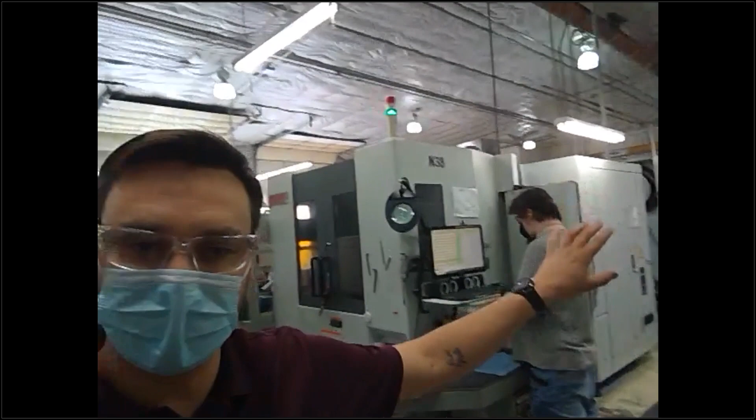So this next area is the production mill area. And let Dagan tell you about that. Yeah, we kind of have 4 main bays, the first of which is our production mill area. Down this row, we have a variety of different mills. We have 3 horizontal mills that's doing some of our more complex work, allows us to access parts from various angles. We then have 5 vertical mills kind of in a row and one behind you here where we do a lot of standalone, smaller work envelope type parts.

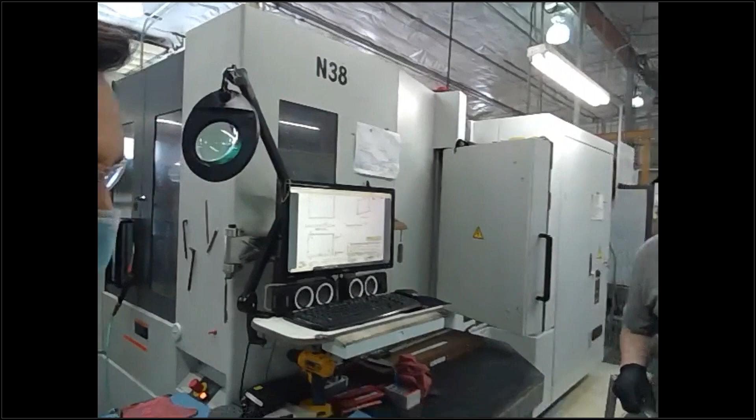Oftentimes, our operators are doing what we call bar to box. So they'll be cutting their own raw material. They'll be loading the parts into the machine. You can see right here at the workstation, we're almost completely paperless thanks to ProShop. So we have the prints open at the workstation. The inspections being done at the workstation. The parts will actually be washed and then put directly into the box right at their workstation.

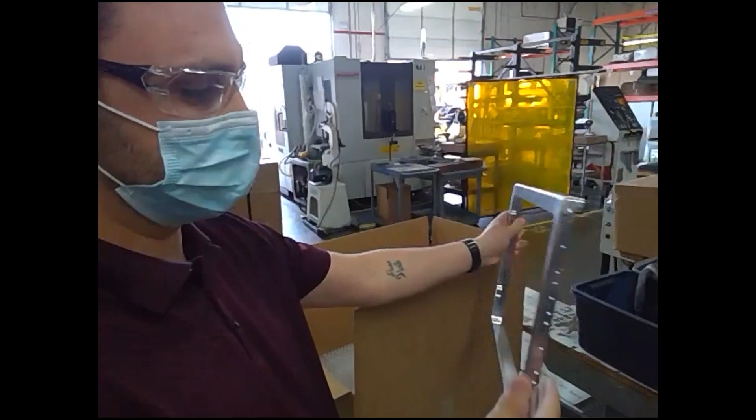An example of the type of parts that we're working on. A lot of aluminum. This particular part's on a horizontal because it's got some side features. And then they're packaging it up and going.

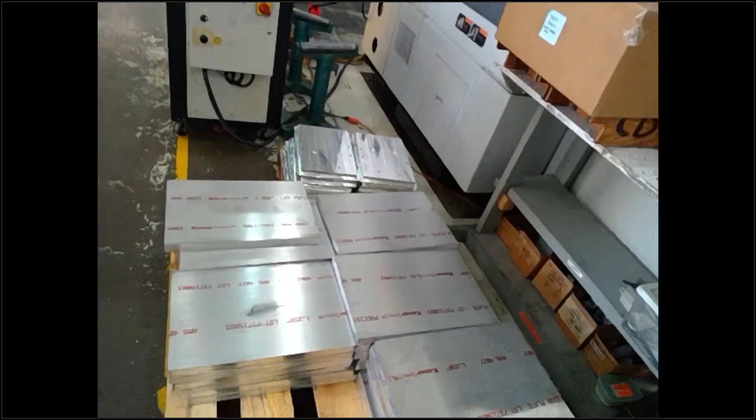So yeah, in the bar to box concept, so there's a plate of raw stock, and then it's going into the machine for a couple of different work holdings on the various tombstones. Coming off, getting inspected right here on ProShop. We can probably even pull up an inspection form here.

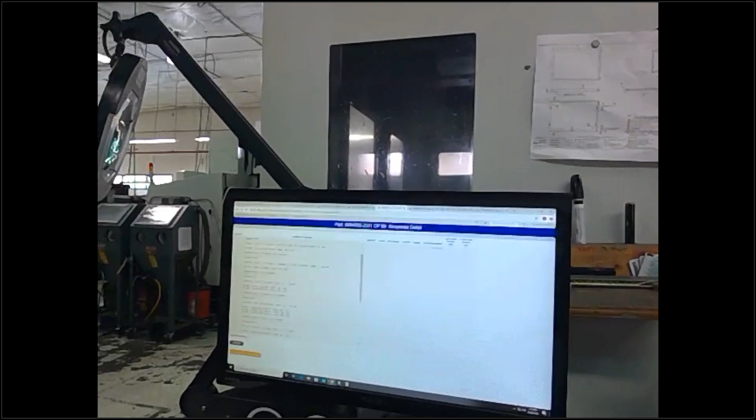Yeah, so here's an example of an in-process inspection that's happening. It's flagging the dimensions in yellow that might be a little closer to the limit, and telling him if anything is bad. And then, like Dagan said, packaged up, washed and rinsed, packaged up in a bubble bag, and put in the box, completely packaged, ready to ship to outside processing.

So we just looked at the Traveler, the job Traveler. Essentially, yes, that was the Traveler. Yep, there's no paper Traveler. There's no paper travelers.

Every one of our workstations has a computer with ProShop on it. They'll usually walk up, read their time-in that's in ProShop, see what job they're running, and then read the work instructions right there in ProShop. Tells them everything they need to know.

You can see some other examples as we kind of continue on here. We have 2 machines here at the end that we'll stop and take a look at.

Maybe show how they identify the product itself too. When you're looking at a pile of parts, how are they actually identified? Because there's no paper involved.

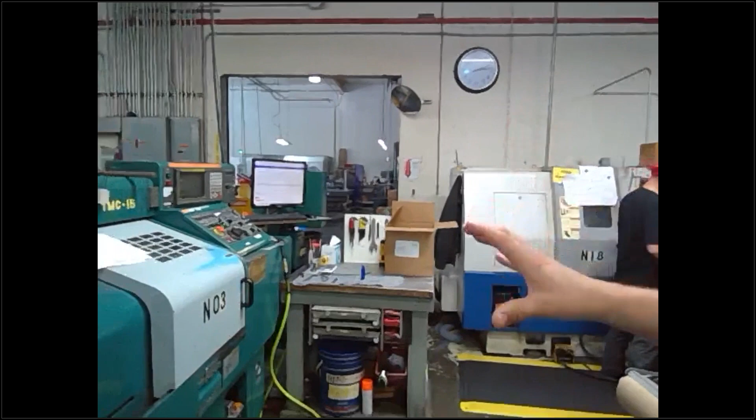We have two machines here that are flowing together. This is now our lathe department. We're running our first operation here. He's got all of his instructions open for that operation. This is what we call the sequence detail, so he's looking at all the tools coming in and everything that's going to happen to the part in each operation in the machine. The part then flows over to this next operation.

As he's running, he's inspecting at his workstation, washing the parts, getting them ready for packaging. And then again on the screen, there's the Traveler.

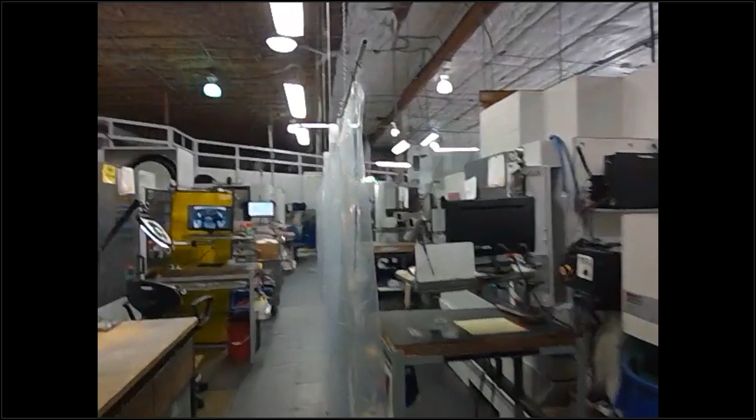You guys hearing us okay in this area? Yeah, it's good, thank you. Still hearing you pretty good. I'm not seeing any comments, so I think we're good to go.

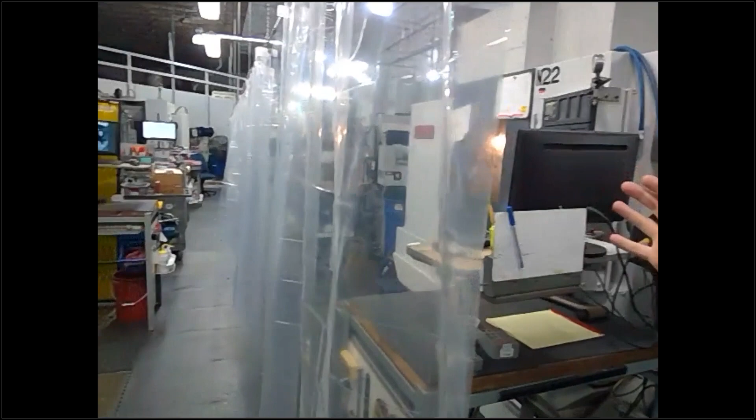You can see our innovative shower curtain solution here to keep a 6-foot distance between people. This workstation isn't currently running today, but it's a great example of how we usually flow these two machines, one operation to the next, with the operator running both machines, blending the parts, masking the parts. He blasts the parts in a blast cabinet, inspects them, and then boxes them up.

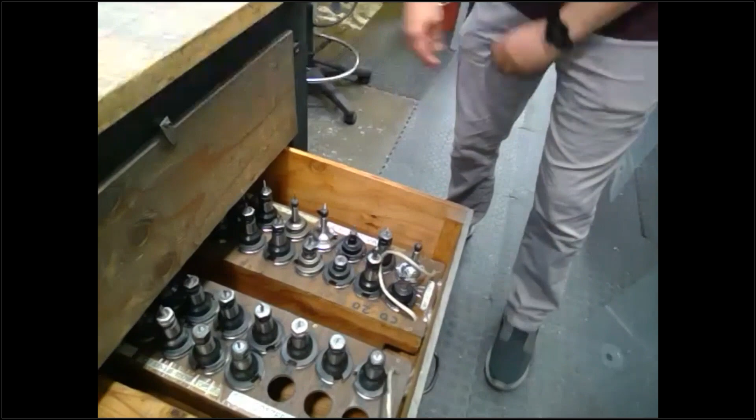One of the more important aspects of making sure jobs get set up well is getting things prepped with what we call a pre-processing checklist. This cell is dedicated enough that they have preloaded tools all ready to go, all labeled for different part numbers they make. That process is also done over at their fixture setup area, which we'll go take a look at.

Here you can see a couple examples of jobs that are ready to get set up. We pre-process them with the tools in a caddy, put the fixtures on the cart, and really anything the operator is going to need to get the setup going. This wheels directly over to the machine so they can load these in, and we'll show you over here how we get this set up and touched off.

I know the signal was a little rough when we were testing. How are things looking over here? No, it's looking good, thanks for that. Awesome, great, it looks pretty good.

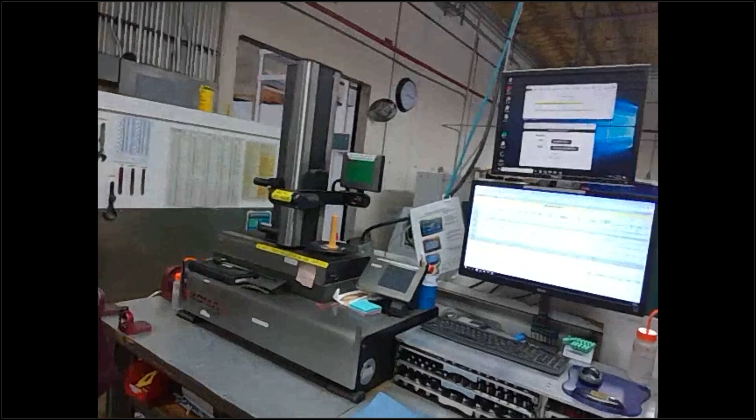This is our tooling area. We have, I think, over 4,000 different cutting tools in our current tool inventory. We have a dedicated pre-processor who sets up the tools for the operators so they can load them into the machine and get going in a relatively quick time frame.

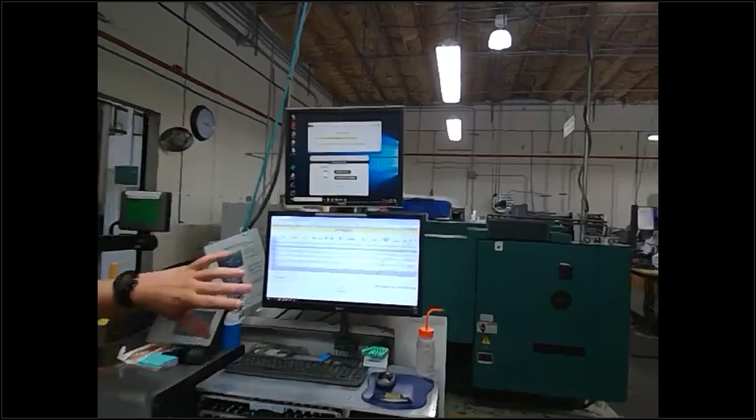He's working with ProShop here. He knows what jobs to set up by looking at the schedule, and he knows what tools are required because they're in what we call the tool master of each job. So he'll open that up, build the tools into what we call a caddy, the wooden caddy we have here, and then touch them off using our laser presetter, which integrates directly into ProShop.

So he can touch the tool off, hit input, and it's going to load all of our tools and their relative tool height into a file that is then uploaded directly into the machine. That eliminates a lot of operator errors, so they don't have to go touch in their tool heights and make a mistake potentially. It's been a very, very solid improvement to onboarding.

So the next bay is what we call our Trulife medical bay. When Trulife took over almost 6 years ago, they make a whole line of modular adapters for lower leg prosthetics, and we took on the machining of all the metal components. So this next bay, we kind of turned into that use.

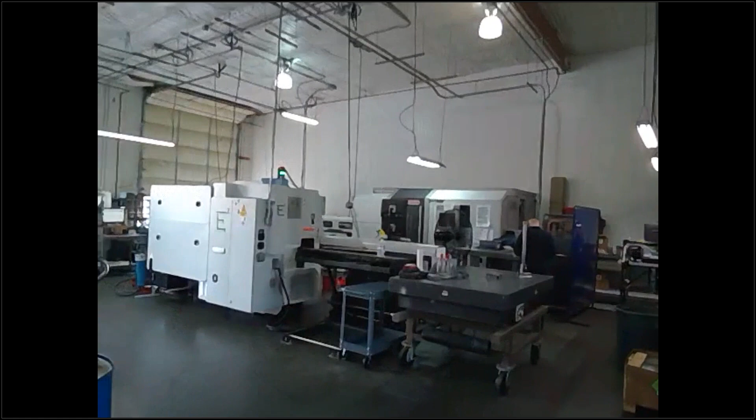We have a couple pieces of equipment that we bought to do that, and then a few that we got from our sister company. So we have 2 lathes right here that are very, very high volume. In this machining cell, monthly, we do 12,000 to 15,000 parts per month.

Both of these lathes run almost nonstop. We try to run them continuously, lights out if we can. And then we have one cell system right here, one spindle, but 15 different tombstones that we store in the back that basically will fixture up the job, leave part numbers set up, and we can kind of keep going. If you want to pan over to the machine, we can take a look at it running a little bit here.

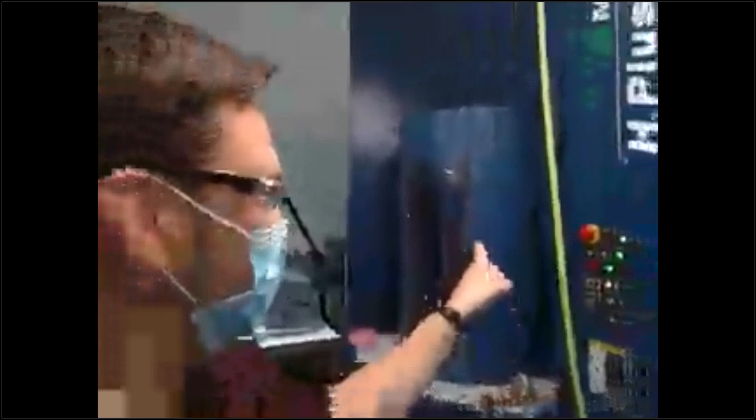Like I said, this machine has 15 stations for tombstones in the back, so we leave these jobs set up. There's a robot that schedules and picks up the work holding and moves it into the machine. We can often schedule several parts to run in a continuous fashion, where the operator will then come over and unload parts periodically.

Also scheduled, inspected, and with all the work instructions right here in ProShop.

Yeah, I wanted to point out this workstation over here. We see more and more of our customers go into this kind of setup where they have the work order down below, and oftentimes they'll have a drawing up on the second monitor. For a shop floor space, going vertical is pretty space efficient.

And you guys still hearing us okay? This is the area that was roughest with the Wi-Fi. Yeah, the video is a little choppy, Paul, but the audio is coming through clearly. Thank you. All right. Hey, Kelsey.

Kelsey, could you go ahead and ask some of those questions out loud for the benefit of everybody? Oh, for sure. Yeah, I was just churning away on them over here, getting them knocked out. But yeah, let me go ahead and just talk a little bit about that.

Just to be clear about travelers, when these guys are talking about that, that's definitely referring to some sort of work order paperwork that would have been standard but is now non-existent. There is no paper traveling with the job, instead it's all digital. And then in terms of identifying components, typically you'll see work order labels that have a work order number, a picture of the finished components, usually a quantity, a part number, that kind of thing, physically attached to the parts so they're clearly identified.

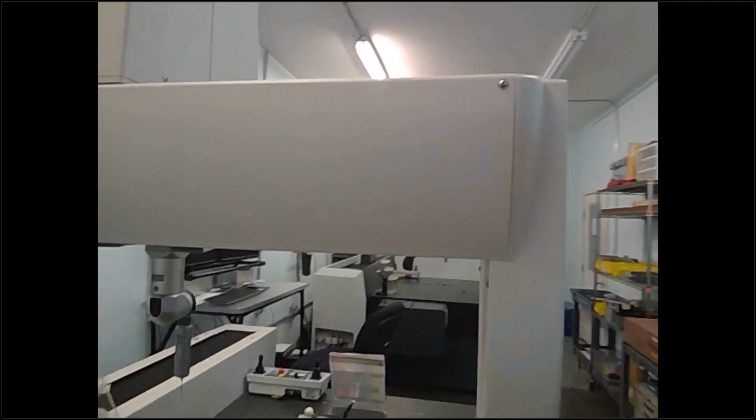We also do all of our calibration in this room, climate control.

Yeah, and all that calibration is also managed inside of ProShop with an equipment module that is used for both calibration and preventative maintenance for any kind of equipment. It sends proactive alerts to the people that are in charge of doing that kind of maintenance activity, and they go grab the devices and bring them in and calibrate them.

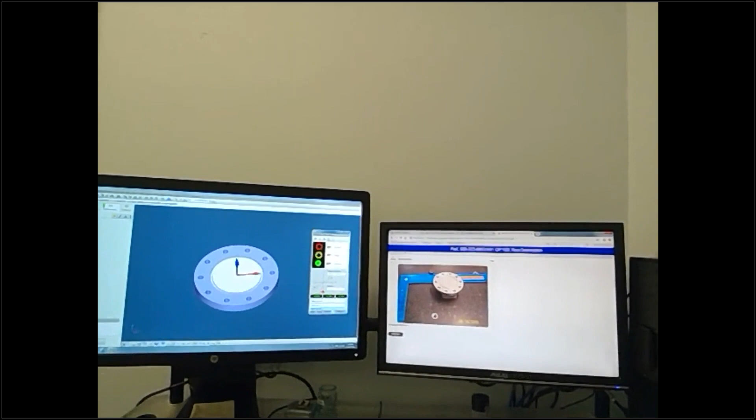Great, thanks. I'll take another question while you guys are moving on to the next bit. There was just a question about, do operators inspect their own parts? I think that's very much a choice companies make individually, but quite often companies choose to have at least a significant set of the in-process inspection done literally at the machine while the parts are being produced. ProShop supports a methodology where, if you have 10 dimensions to check on a 10% basis, you might as well go ahead and check one every part and get that actually validated. Then every part gets a little bit of inspection, even if your average over the run is only 10%. So that's definitely something ProShop supports, and lots of good companies are catching defects much, much earlier through that mechanism.

And what you're seeing on the screen now is just an example - on the left side is the Calypso software, and on the right-hand side is the ProShop work instructions for how this is set up on the table itself. While there's not a part on there, you can see that T-square that they use to align the part in the right location. So just another example of visual work instructions.

All right, let's go. We're going to go check out the prototype department. We should mention, because this is a Saturday, the weekend shift is on, which is a lot smaller in many shops, including here at Trulife. So normally there's a lot more folks here walking around.

This next bay is comprised of our prototype group. Those are journeyman level machinists who have Mastercam at their workstations. Usually their work is confined to small quantities with a quick turn. A lot of the administrative planning functions get bypassed, and these guys figure out how to make the parts kind of all on their own and turn them quickly. Currently we have five full-time prototypers, one dedicated to the weekend shift, so he'll be over here programming and machining as he goes.

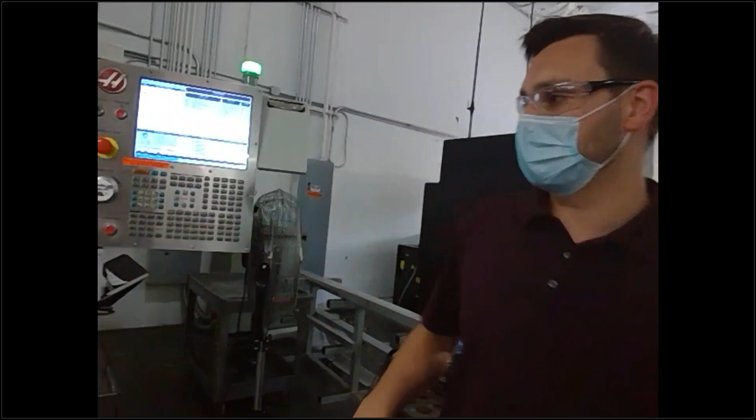Also within the same bay, we have our production 5-axis. Here's a 5-axis Haas machine and an operator inspecting as it goes. We'll go take a look in the machine if you can make that out. This is a big enclosure for a fan for an airplane, I think an air circulation fan, and we can see an example of one being inspected. Say hi, pretty cool part.

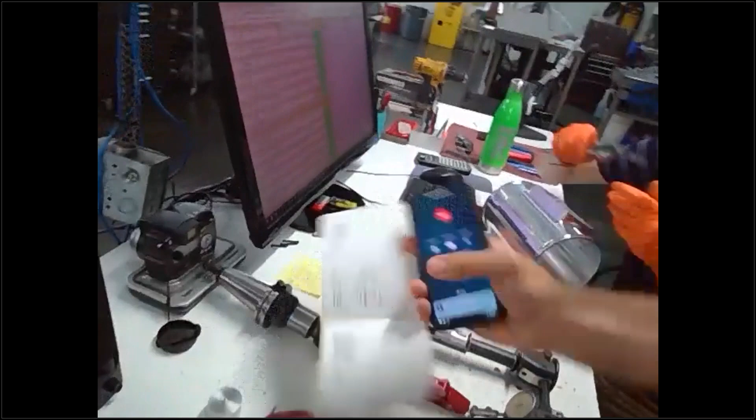On the screen is their in-process inspection results, like you've seen at many other stations. And here, by the way, are some of the job labels, and in these I believe they even label each individual part, just printed off on a label printer.

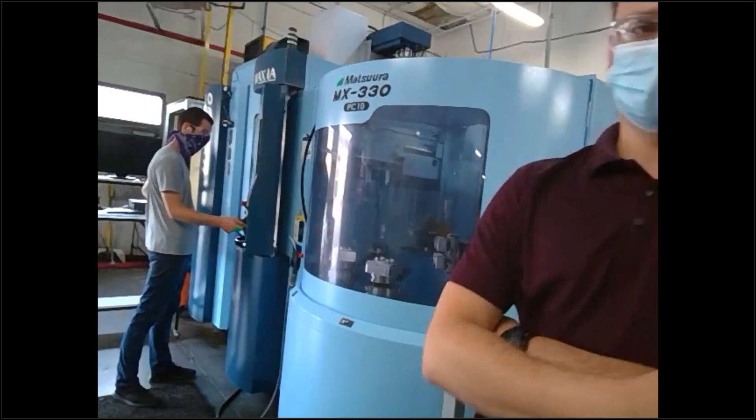There's been a couple questions in regard to those labels. Those labels not only identify the work order specifically, but have a little bit of context of the entire job, including often a picture of the finished part, so people can visually identify exactly what they're working on. But the intention is to deliberately not provide information on the labels that would become obsolete quickly. We're trying to show the limited amount of information that keeps people in the know without getting to a situation where you're no longer meeting your AS and ISO requirements for revision control of documentation. So we cut the line there at a box label, without going all the way to a level of routing steps and who should be doing what—that information should all be digital, so you can maintain it at the correct revision all the time.

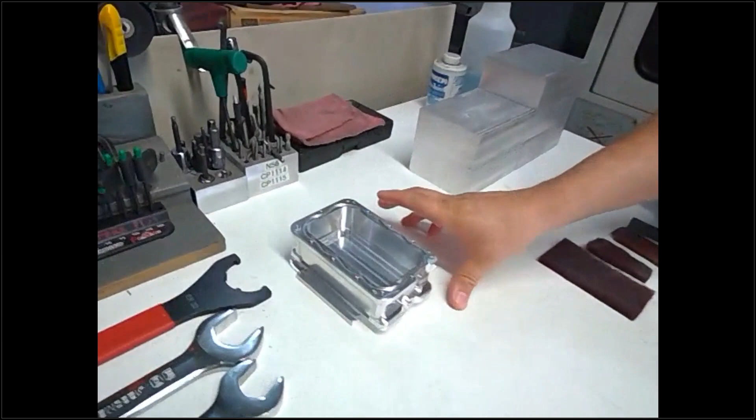We have another example here of a part that has some pretty detailed work instructions because of some cosmetic requirements. We currently have this running on a 5-axis machine. You can see the operator had his work instructions open, and it shows him exactly how to process this part—how to load it, how to tap it down, what to do once it's finished. It shows him pictures of the finished part, detailed instructions on how to get the part to that state, so we can really standardize our work and make sure our products are looking consistently up to our par.

Hey Dagan, I had a question for you along that line. One of the main things I often get asked when we look at this kind of detail is: what did it take you, like 10 hours to document this? Or is this the kind of process that, with a phone camera and ProShop on your phone, you can do in 20 minutes? What are we talking about here?

Well, first of all, we ask that when we do a setup, we verify that the run description is up to date before we certify the job to run. So this is something we do every time we set a job up for a first run, and it happens pretty quickly. We have a camera that integrates right into ProShop—it loads into what we call a camera file holding tank, and they load their pictures. But we also have a process of continuous improvement, a constant feedback loop through part development, where each time we run this job, operators have the opportunity to identify process improvements that can be integrated right into the run description later on. Oh, awesome, thanks Dagan, I appreciate that.

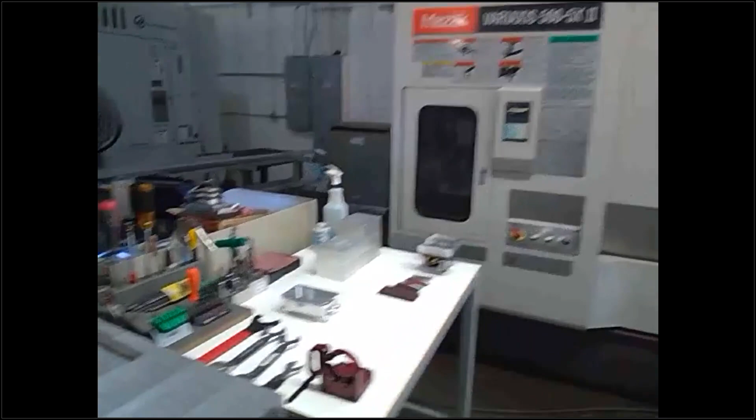Going into fixturing, it's coming off the machine complete on the 5-axis, and inspection right over here. And then, as I showed you before, the box with the label and the parts, bubble wrapped, and even the operator employee number is tagged on there too, so we know which employee made every single part.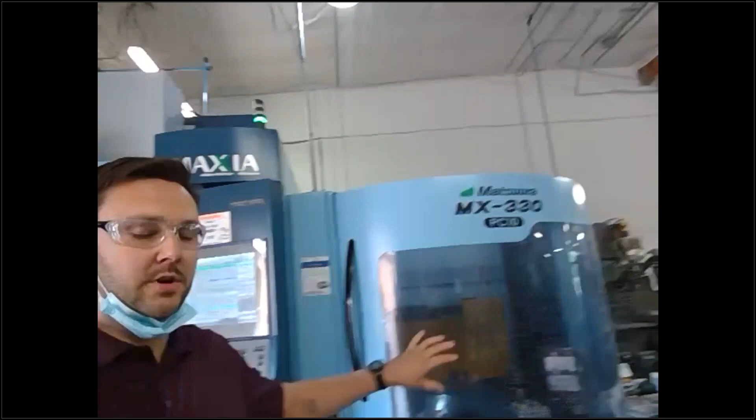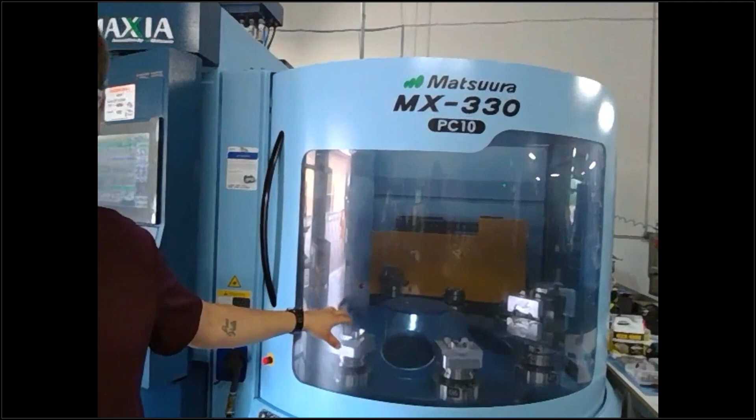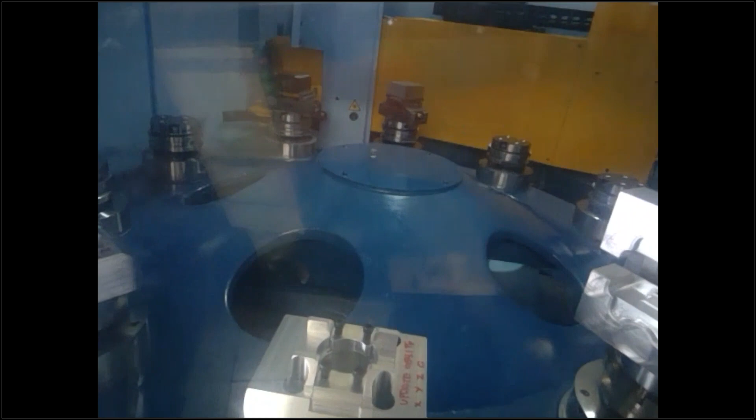This is one to touch real quick. This is our newest piece of equipment, just delivered a couple months ago, a 5-axis semi-cell system. We have 10 pallets that we can load up and basically keep running, pretty automated. One of the reasons this 5-axis department runs with only one person back here is that we can load all these parts up, schedule the machine to run, and have it run continuously, lights out. It's allowed us to become a lot more efficient. We get really consistent part quality, and we're pretty happy with this new addition.

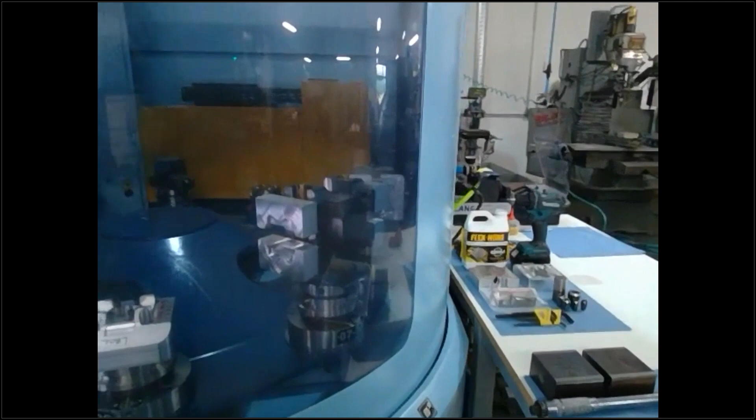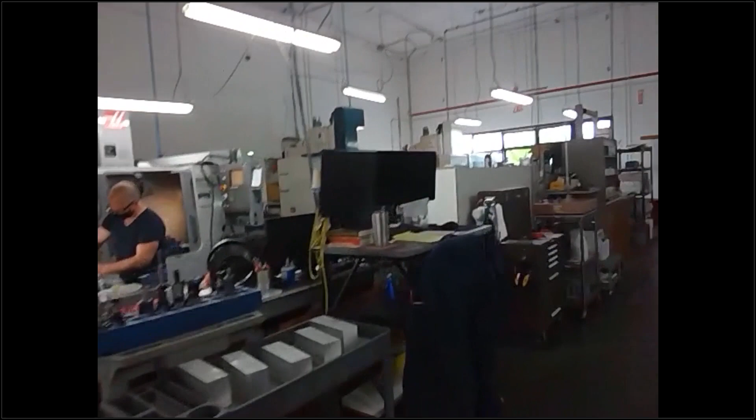Just for a bit of history, we decided - what year, Kelsey, did we decide to go with a dedicated prototype department? A long time ago - 2002, yep. We were trying to mix prototype jobs in amongst production jobs, and as I'm sure most of you know, that's a really tricky situation sometimes.

Wanted to stop and show this - I sent a little LinkedIn video on this. This is one of the lean projects that the crew built years and years ago. This is a mobile packaging station. Up at the top here, you have different sizes of bubble bags, all with their labels, some plastic bags, the tape gun, a little pull-out shelf which pulls out, gives you a spot to package, a few different sizes of boxes right down below, and that's all sitting right next to this label printer, so you can print off those box labels or packing slips when parts are ready to go.

Yeah, thanks for that, Paul. There was actually a question about that - where and when are labels printed - and I think I said that you should always print labels as soon as you have physical product to trace. That's the whole point: you've got to identify your product as it goes through the company, and that's an example of that. The other thing people often ask is, why do you have a machinist packaging parts?

That's always a question, and the main answer is that typically, if you process a product through its value stream as far as possible in one go, you can actually eliminate more waste than trying to segregate it and move it and have it sit in places. That's lean philosophy at its best - try to get that process through as quickly as possible. You could ship those parts we looked at in bubble bags right now. If somebody came and said, hey, we need to get those out to plating, they're ready to go. All those parts, however many you have, are ready to go. So that's one of the values there.

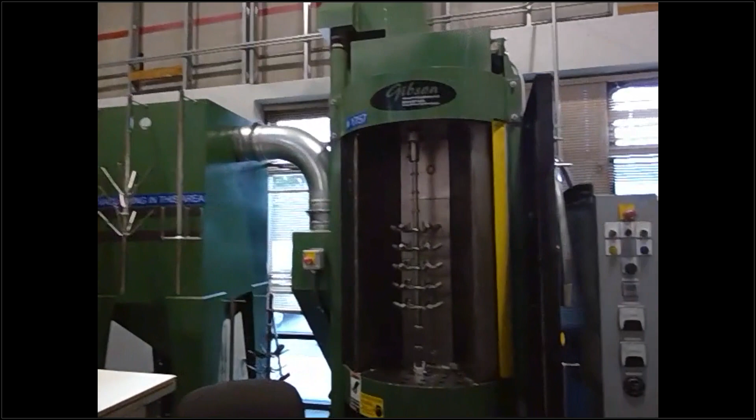And typically we found a lot more value than maybe something where you have a little bit of difference in pay scale between someone who does packaging or machining. It also reduces your risk of having your pile of parts knock over and damage each other. But yeah, there's lots of risk mitigation there. Sorry, I'll let you guys carry on.

All right, we're looking here at our shot peen machine. This is where we take our Trulife medical product, all the aluminum components. After they've been machined, they come back here and get shot peened. A couple things - it's going to strengthen the material a little bit, and it's also going to provide a cosmetic finish so that once we send it out for anodizing, they come back looking very uniform. You'll see an example of some of the finished products as we get closer back here to assembly.

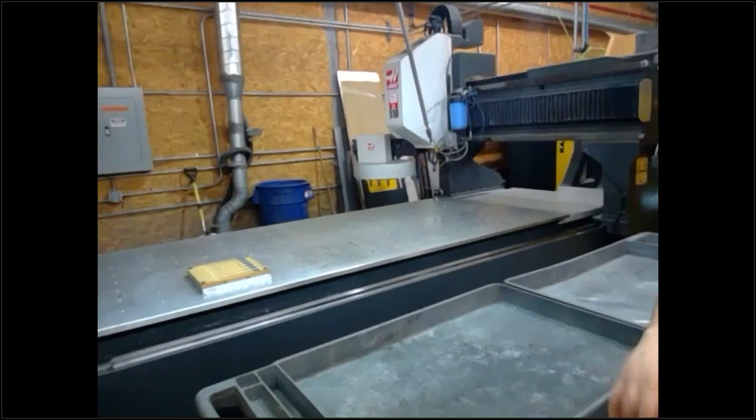And then right behind us, we have two larger work envelope machines - a large Haas VF7 and a Haas gantry. The gantry is used mostly for tooling projects and smaller type projects that don't necessarily require a lot of coolant. And then we have this big machine here that we do larger hog-outs on, some machine prep operations, and then we also will load up with a high density of small components as well.

We have one other work cell that's currently not running as a result of the current situation, but this is entirely dedicated to one project. This bay and this one machine right here is dedicated to a project we have directly with Boeing to supply basically a coupon. So we have a 50-taper horizontal mill right here that's tooled up with two vacuum fixtures.

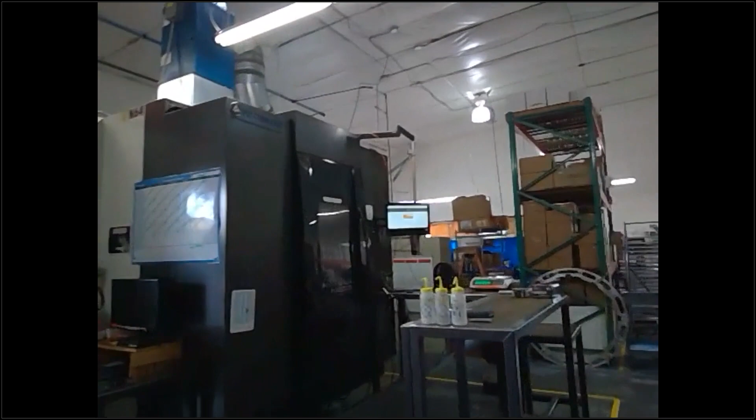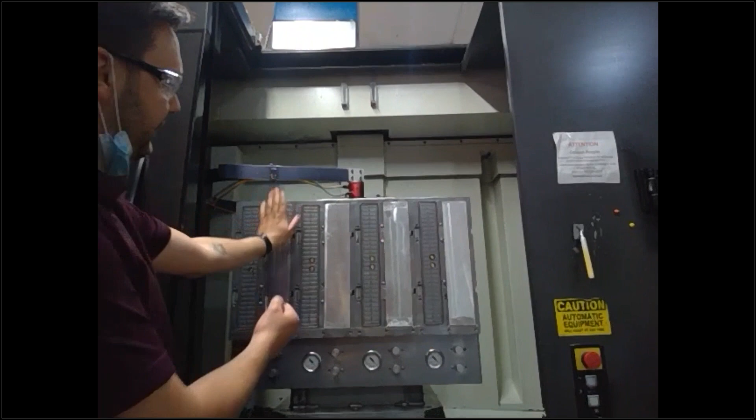Allows the operator to load the raw material into one station and then flip it 3 times with each cycle, so that each cycle you're getting one finished part off and continuing the next part along the progression until you get a finished part. We typically, when this was up and clipping along, we were doing about 10,000 parts a month just through our coupon production cells. So a lot of raw material storage and challenging traceability to manage, but overall the machining process is pretty simple.

And then the next group we have here is our assembly group. So there's some larger tooling type assemblies that we work on consistently, and then we have a lot of standard aerospace general assembly. So a lot of insert installation. Looks like we're doing some wet install and a little bit of insert installation there. We have a paint booth.

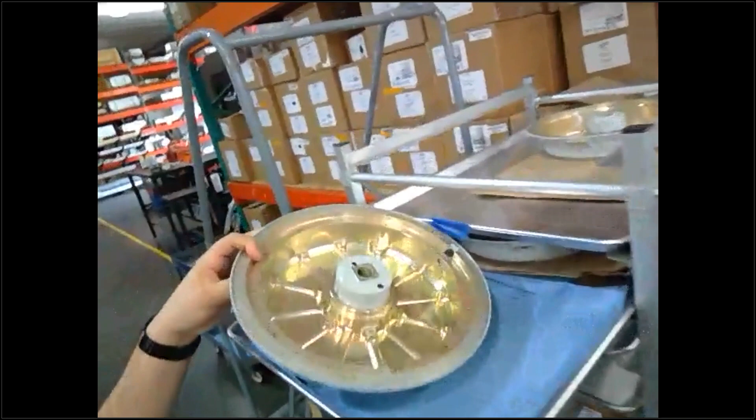A good example of maybe a part. Look up here, to do some insert install after it's been machined. Goes out and gets painted. Comes back, gets a couple of press pins and some inserts. Out the door. And then, in addition to our aerospace general assembly group, we have what we call the Trulife assembly group that is doing all of the final assembly and packaging for the modular adapter line that we talked about.

So these guys, once the parts come back from anodized, they head over in this direction. They get laser engraved so we can put our logo and part number on the part.

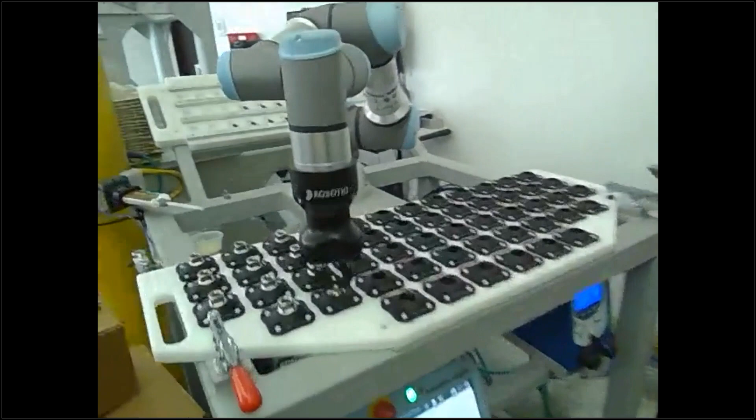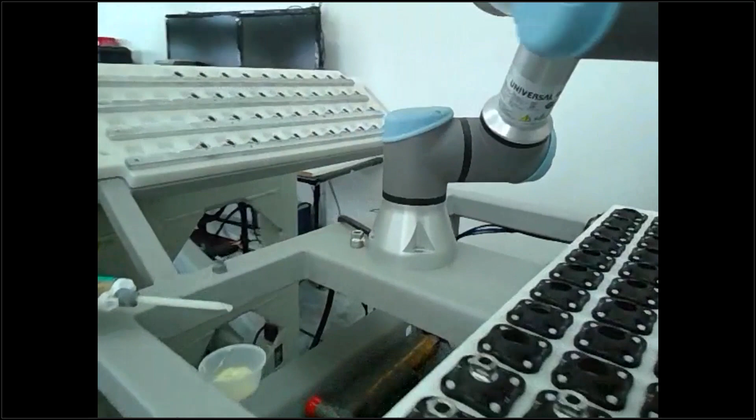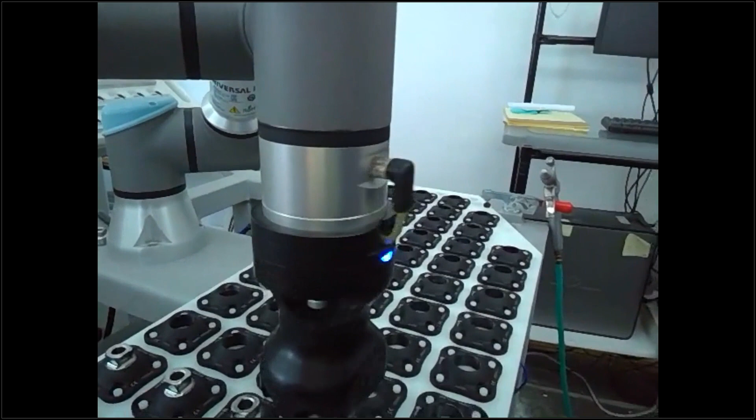In this case, we've actually automated one of the assembly functions here. So this is a UR robot that is currently bonding a threaded pyramid to a base. So what it's going to do is pick up the pyramid from a back tray, apply some glue back here, and then thread it down into the base. So I think we package and sell about 2,500 of these a month, and it became clear that automating it would be a pretty slick maneuver. So we tried it out. We were really happy with the results here.

The rest of the assembly functions, you can kind of see some examples of the finished parts. A lot of them are just set screws and packaging, but we go as far as put the parts in a package, a label, manual, and then actually get directly out to distribution. So this is kind of the final assembly for a lot of this product. Our sister company will do the complete assembly of the feet, and then a lot of that will actually get done in a clinic.

See lots of shadow boards and sort of lean workstations all set up for just their specific purpose.

We're gonna walk back up to the front. If anyone has any questions, now would be a good time to maybe answer. You guys still hearing everything and seeing it okay? Yeah, it looks great, Paul. I had a couple questions I thought I'd bring up as we're going through, as you guys are walking back up. One of the questions was, how do you maintain lot and labor traceability? Obviously, those two things are a little bit separate, but if you guys wanted to just even show a workstation where someone's logged into a job, that might be helpful.

But basically, the short answer to that is on the lot traceability, yes, everything is associated with a work order, but beyond that, ProShop also supports full serialization, which would include individual serialized pieces. Each component has its own serial number, which I think you guys noted there was some area where each part was getting a tag. But also, you could serialize a small batch of parts as an option as well. So the thing about traceability in lot traceability would include completely all the way back to raw material. So when they prepare a document package, and you guys may be headed back up to the final inspection area now, but just taking a look at a completely prepared document package might be a useful thing.

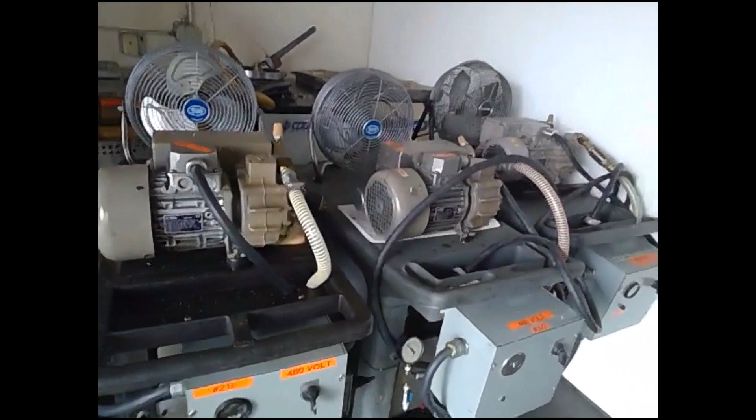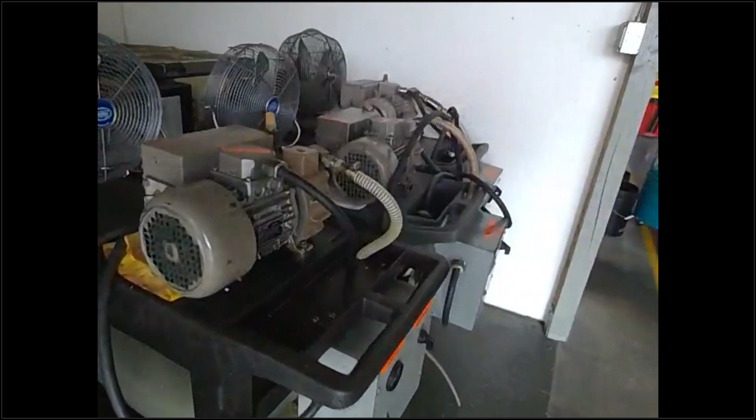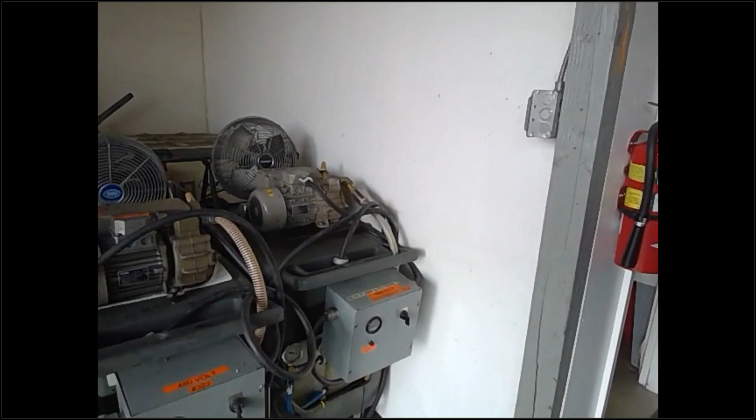What I wanted to stop for a moment and share here, these are things we built years and years ago. So we did, and Trulife still does, a lot of large flat parts that require vacuum work holding. And these are highly efficient 480 volt small vacuum pump carts that have an accumulation tank, the electrical stuff, all the plumbing, and these can be wheeled next to any machine that needs vacuum. And all the machines are wired for 480, 220, or 240 and 120 power, so you can plug almost anything they want and keep it nice and lean and make it kind of modular that way.

Yeah, thanks. There's another couple questions here. One thing someone asked is, is in-process inspection considered final inspection?

I just wanted to address that. Of course everybody treats that differently, but ProShop in general pushes companies to inspect product as close to the time of creation of the spec as possible. So if you're machining the parts, try and inspect them right at the moment that you're actually producing those parts, because then you have an opportunity to change direction. If you've produced all the parts and catch a defect later, of course you don't have any opportunity.

But almost everyone uses at least some level of final inspection, even if it's not dimensional. Even if they're validating that all the inspection dimensions were complete and done, it's definitely the case that final inspection is still an integral part of ProShop, and that often includes that sort of document package. Whether the client needs it or not, there's often a review at the final inspection before product would leave to confirm that everything required has in fact been done.

Yeah, and we'll swing by that department in a minute. Where we're here right now is in the receiving area, and we won't pull it up on the screen. The receiving guy is out for Friday, but here's an example on the desk of a material cert that comes in with some material. It'll get scanned immediately right here and attached into ProShop right on the vendor purchase order by line item, and that's the beginning of that traceability all the way through final inspection. And then the raw material will just get tagged and move to where it needs to go.

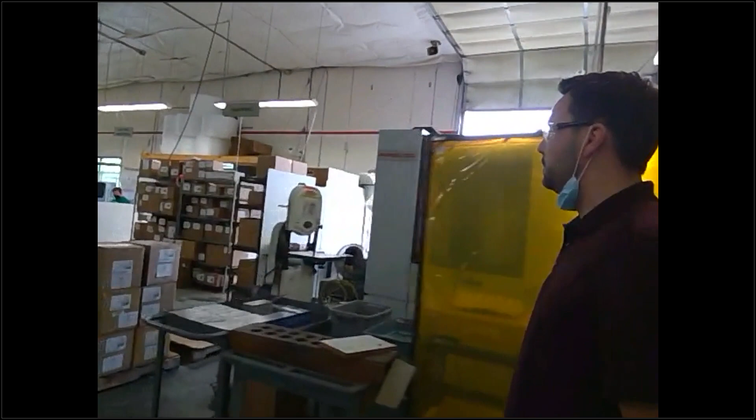Yeah, and that was actually something we deliberately left out of ProShop as an example, because it's much better managed with that kind of system than all the overhead that would be associated with decrementing inventory and trying to keep track of reality. It's like, hey, just put in the card at the right spot in the inventory and you can have a fast and efficient reorder mechanism.

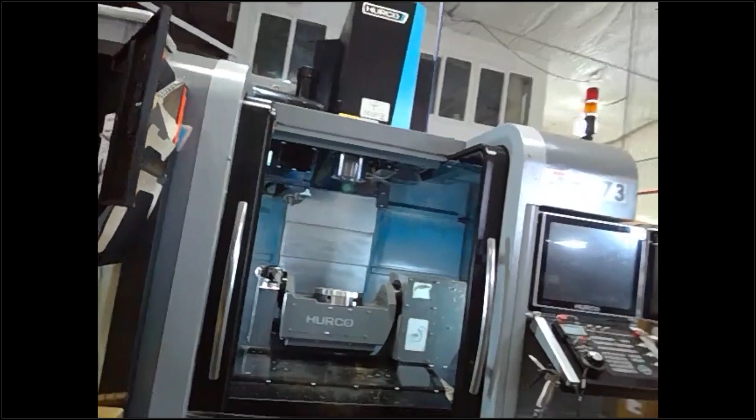So I'll take a little diversion here for a second. This is a fun area. Again, not running on the Friday, but this is a dedicated cell. We got two 5-axis machines that do nothing but these sort of very high-end saxophone mouthpieces made from various types of wood and brass. These mouthpieces go for like $850 a piece, and they're all done with full 5-axis milling, contouring, surfacing, and lollipop cutters.

It's pretty high-tech stuff. Here's an example of a finished assembly that has all the components gold-plated and all that kind of good stuff.

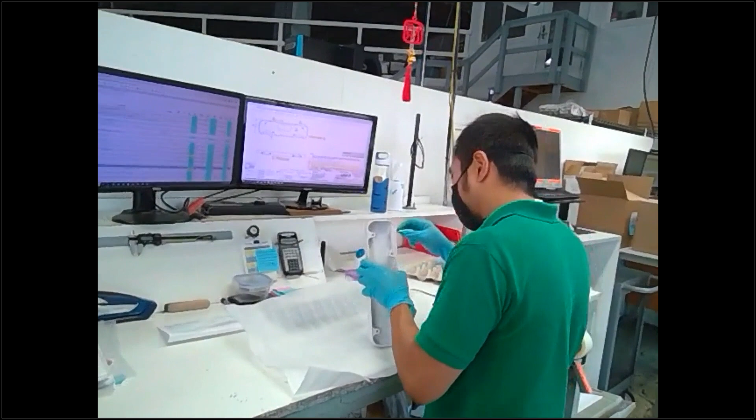So one thing I just want to touch back on that Paul was talking about in terms of tagging material. There was a whole rack full of raw material there, and people often ask, do we need to put a big label with all the details about the product on there? Obviously you could put some kind of tagged label on there, but really the same principle applies as what we were talking about with the work orders, which is you don't want that information to be relied upon as the final word. So quite often people would put just a purchase order and line item number, and if you want to do all the traceability, you can go ahead and do that through ProShop by looking up that PO line item, and then you have every detail, including who brought it in, when it was used, all the places it went, just by having that one number.

Thanks, Kelsey. All right, we'll let Dagan explain what's happening. Yeah, so we're over here in final assembly here. You can see the inspector was doing some dimensional checks. We're doing a lot of cosmetic checks.

And then in addition, this is where we're going to finalize and compile and submit our necessary documents. So any of the AS9102 documentation, anything that our customer requires, the cert pack is going to be compiled and finalized here. We do incoming inspection from outside processing, outgoing inspection before we send it out, and then final inspection before it goes to the customer, in addition to the inspection that we're doing at the machines with the operators.

So these guys, we currently have 3 of them here inspecting parts, are also responsible for kind of maintaining some of our finished goods inventory for some of the agreements that we have for stocking with our customers, as well as our calibrated inspection equipment that they have down there. And as Paul mentioned, that's all managed through the equipment module of ProShop.

Yeah, when I used to give shop tours, people were always amazed at how small the shipping department was.

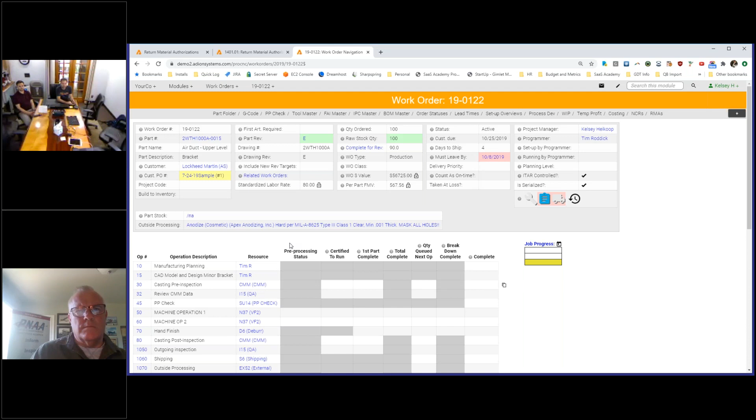One thing we don't do natively is send things out over RS-232 communication, although very few modern machines use that protocol. It would all be network interfaced to be able to do that, or you can have it available at a kiosk where they would send it over an RS-232 interface and access it directly from here.

This one I was going to go for a first article on, but actually this one hasn't been completed yet. Let's see—work order 160039. Good example of where, yeah, maybe I could have barcoded that faster, but no, they're wrong, I'm trying to do it from memory.

I'll look up part number 41114. Oh, okay, sure, we'll go at it from the part number angle. Sorry, did you say 440? No, 41114, no zeros. Yeah, there you go, your history.

Okay, yeah, so this one here, right? Yep. So if we look at probably the oldest, we've got all work orders, the first one at the very bottom. Maybe it's from 14—what year is that? 18, oh it's 18. I was going to go way too far back.

Taking a look at this, you can see, for example, that one of the things we could look at is just a first article master, which is everything that would be associated with this part number.

And you can see it's split across multiple different operations in this case. So this might be an example of where we're talking about specific criteria for this component, and initial operator first article inspection, as well as QA, and then a possibility to have a QA second. And you can see things that were near tolerance.

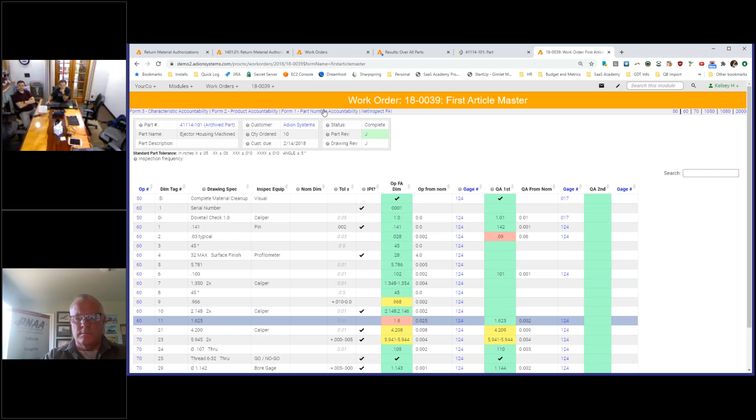But then of course, we also go to the full AS 9102 format that would be output to a particular client that would want this in the AS 9102 format. So that's a bunch on that front.

I do have a bunch more questions coming in, so I want to take a look at those. One of the questions for Dagan is: do you currently have any internal training programs for your employees at Trulife? If so, what types of topics do you cover for them?

Yeah, in fact that's all managed in ProShop as well. We have each operator have their own what's called training matrix. So when an operator is hired, or an entry-level operator, each position will have a defined amount of training IDs and tasks that they're expected to learn.

And within there, you can see all of the training records, as well as the description of the training ID. Our supervisors and occasionally some managers will do training with operators. You can see, like in this person Kelsey's personal profile, he was trained in a variety of positions. It'll tell you the proficiency of the skill they've been trained in, as well as a timestamp of who trained them and when.

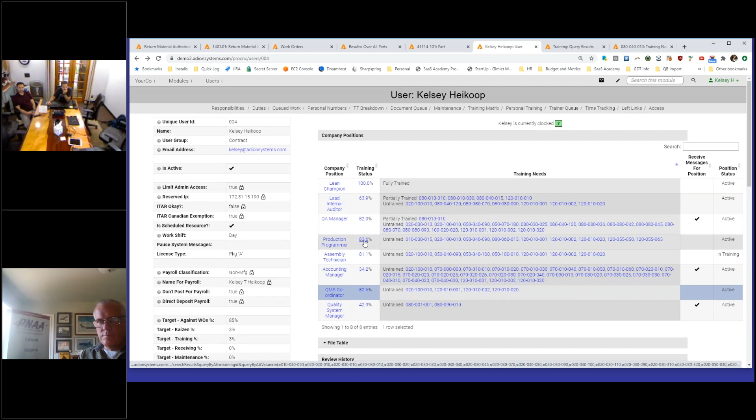Yeah, each position is defined with a certain amount of training needs that you can see over there. So then as they are hired into a position, we know exactly what tasks and training IDs they need to go through. And we try to progress them through that training as quickly as possible.

One of the things I don't know how much you use this as well, but there's an opportunity to have the position either active, meaning that per the ISO standard they need to know how to do this entire role, or in training, meaning they're wanting to be in this role, like wanting to become an assembly technician, but not yet really at that level. From an ISO perspective, the expectation is they will have still some outstanding items that are untrained, and then you can migrate them into a full position for that.

So that's definitely one thing. A few other things here: there were some questions about basically what's required in terms of digital equipment to do these digital interfaces. We do have some recommendations on a bunch of that, but we also have a bunch of client feedback. We've actually solicited from all ProShop customers a nice list, and Paul can probably provide that after the webinar, of a bunch of different kiosk installations and that kind of thing.

Another question was about EDI exchange, which is electronic data interchange compatibility. EDI, for those who don't know, is sort of a legacy, like 35 or maybe even 40-year-old method of transmitting data between systems, and it's based on basically plain text kinds of files. We don't natively try and connect with EDI files that often, although we do have some clients that do ingest a little bit of EDI.

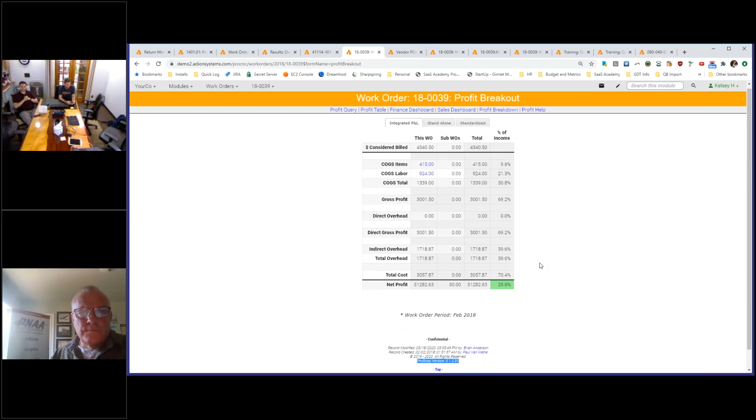But in terms of all those requirements, ProShop in the current version of the software is, I'd say natively - meaning no extra work on your part - 96, 97% compliant. You may have to have a process control to fully meet the standard in one or two areas, depending on your business model. But we plan to be level 3, 100% native compliance, meaning no extra work from your end in context to ProShop. I just want to be clear that in order to be compliant as a business, all software you use, not just ProShop, has to meet that standard.

And we've developed a tool, coming out maybe the end or middle of this coming quarter, that will help people walk through that process just as though it were a quality management system implementation. We call that a standards implementation process, a SIP process. It'll help you as a business take templates we've created, utilize ProShop fully to meet those requirements, and then extend that across the rest of your business in all the other software you use, because ProShop is likely to be only half of the total software you use. You've still got email, and signing onto the McMaster-Carr website, right? So you've got to trace all those things, and they have to be NIST compliant for you to be NIST compliant.

Thank you. Yeah, deep conversation there.

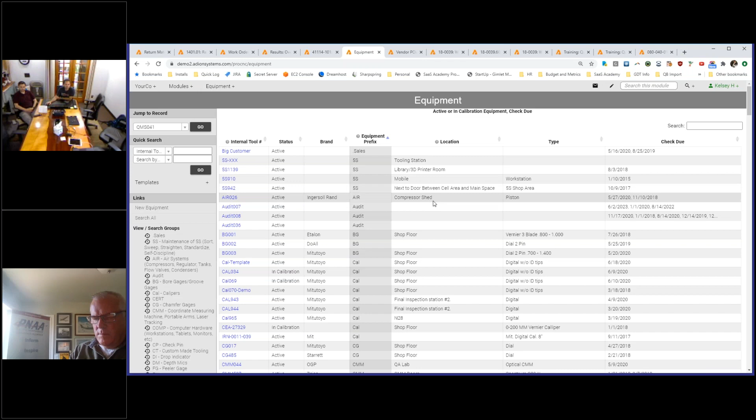So we talked about this equipment module, and Dagan, you had talked about using the equipment module. One of the questions is gauge calibration, gauge tracking, and we do have this entire equipment module which clearly covers exactly that kind of thing.

I mean, like you look at calipers, or what's that? My caliper 034, it's this one here. Yeah, okay, oh, should have got that.

So basically what we're looking at here is a particular element that's a calibration - and calibration is actually really the wrong word.

Kelsey, yeah, you're showing part of your secret server on the screen. Oh dear, thanks, that's great. It should be only showing that. What are you seeing now?

Just ProShop. Interesting, so it's not limiting it to that particular screen. That's a little bit unfortunate, I was not expecting it to do that. I've got a 4K TV as his monitor, and it's kind of complicated for sharing sometimes.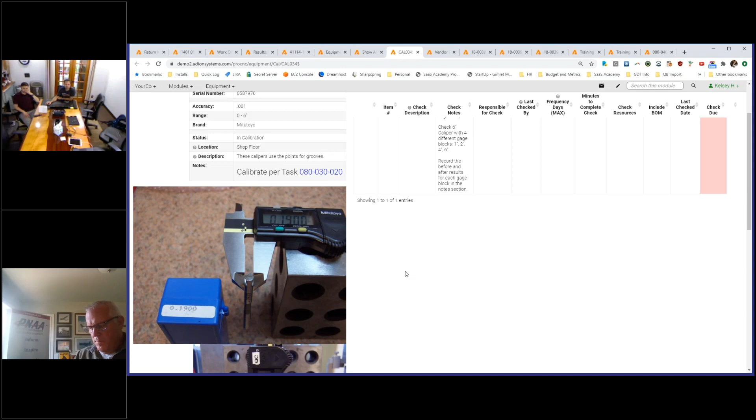So basically what we're talking about is the difference between calibration and validation. If you're actually in the business of recalibrating equipment, meaning changing how they actually would scale up and down, that's a different mechanical skill set and sometimes a programming skill set. But in validation, we do that all the time against NIST standards, and you can actually see through the history all of the different things and times.

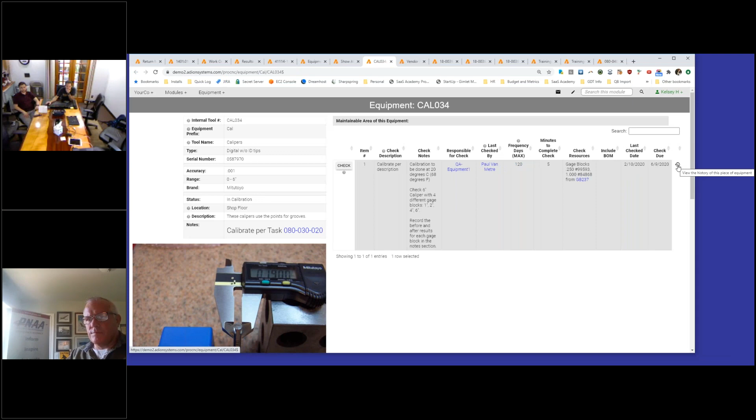Oops, that's not what I meant to do. Yeah, the history of the piece of equipment, you can get that. I'll just grab that, put that in this. Sorry. With all of the different times this has been calibrated over the history of the gauge, and then all of the things it was gauged against.

So you can see there's other like gauge blocks and other things that would be used to actually trace the NIST traceability of this particular equipment all the way back to its original source and NIST traceable document from the manufacturer or from an external source. Gauge block 237 does have certs attached to it.

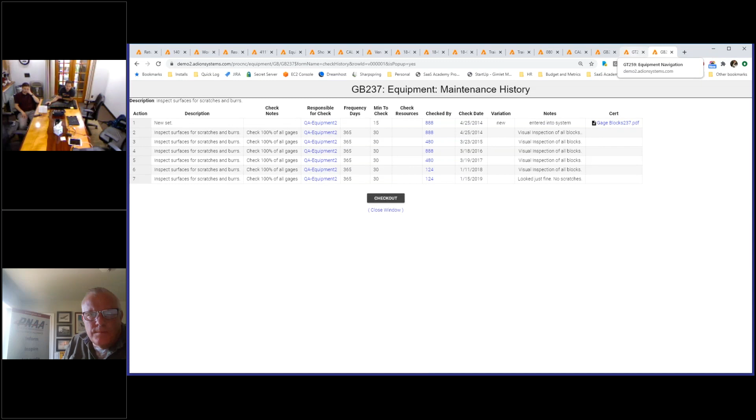Oh, okay. Yeah, right, so then we're talking about this gauge block set, right? And basically when we probably first purchased this, that was something that we definitely had - the outsourced one. Yeah, so this PDF is the one that we're gonna have as like, oops, not that PDF. This is the second equipment item that has the outsourced gauge calibration. This one, right here. No, wrong again. Okay, sorry, this one here, this one. That's the one, yeah, right, okay.

I am putting this link in because I keep getting the pop-up, which you guys don't see. So that's why I'm copying that in there, is because my pop-ups aren't being displayed on our screen. Like a quarter of it. Yeah, I know, it does work. So this would be traced right back to the initial cert that came with the gauge blocks or whatever. Sorry about that, a little bit cumbersome with not seeing the pop-ups.

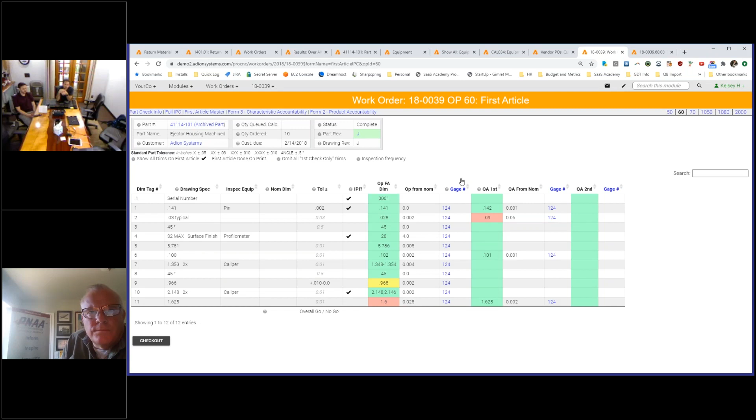Okay, did we have some other questions? Oh yeah, there was one about splitting time, and I just wanted to cover that pretty quickly and easily. And Dagan, I know that since you guys process a lot of work in flow, you have a lot less need for time splitting, but I'm sure you must in many situations have people working on multiple things.

Yeah, the 5-axis work cell you saw was a great example of one operator running either 2 or 3 of those machines. So absolutely it's something that we do through time tracking, which you're about to show.

Yeah, so basically what we're seeing when we go into a time tracking record is, you can be logged into multiple things. So in this case, I'm already logged in, or still logged in, to 3 different other jobs. And I could do a small percentage onto a new job - I'm going to do 20% setup on this new work order that I'm going on.

I could either force the log out with the rest of them, or I could keep them running and just say no, I'm not going to log out anything else - I'm going to do 4 jobs at once. And you can log into that.

It's warning me that I have process development and that maybe I'd like to explore that. I won't at the moment. But then it's telling me, yeah, these are all the things that I could, or that I am currently running at the same time or setting up. So yes, it does support all of that from multiple perspectives on multiple jobs, on multiple pieces of equipment.

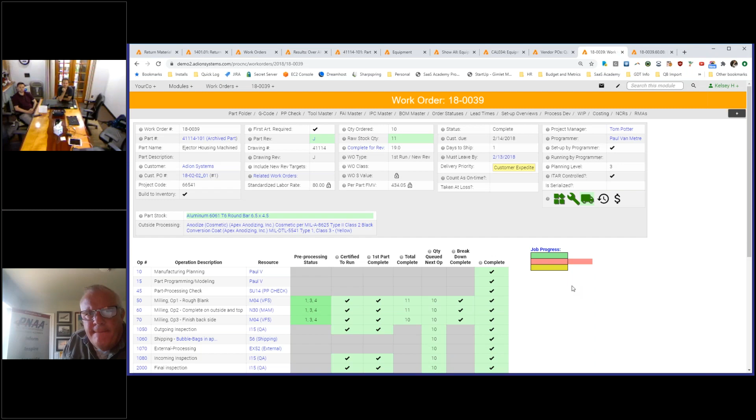That being said, it's pretty straightforward to send an invoice over. If you're on an invoice for a particular product, this one's already been added to the accounting package, but you can see straight up when we choose this... am I still showing? Yeah okay, you're not seeing other screens.

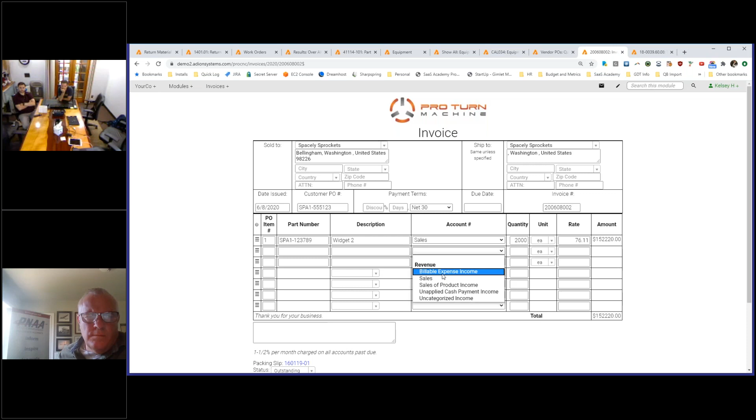We're getting a list of accounts directly from the accounting software. These are not in ProShop - there's no list of accounts in ProShop, but there is right here a list of accounts from the accounting package that we could choose from, like sales of product income. So I wanted to be clear that although ProShop is not an accounting software, we definitely have a high degree of overlap and send a lot of things that way.

There's a good little video in our video library that shows a workflow from packing slip through invoicing into QuickBooks Online - people should check that out. So that's actually your question - yes, we integrate with QuickBooks Desktop, most of the flavors, and then QuickBooks Online also, and we do some flavors of Sage as well. So those are some of the accounting flavors we handle.

Accounting flavors - I don't know, has it got that taste in your mouth, Paul? Yeah.

The question earlier about inventory moves from Alan. Maybe just pulling up the inventory table for that 411 part again. Sure, yeah, we can just take a look at the inventory table.

Sorry, I was just looking to see if I could find that question because I must have somehow overlooked it in the chat - 255, how do you track inventory moves? Okay, yeah, so basically you can see that when this product was built, it was for a specific number, in this case 50 pieces, but 10 extra were sent into inventory.

So that's why we have this 10 here, 10 were sent into inventory as surplus. Oh, I'm sorry, 52, two extra. Yeah, we serialized 10 of them.

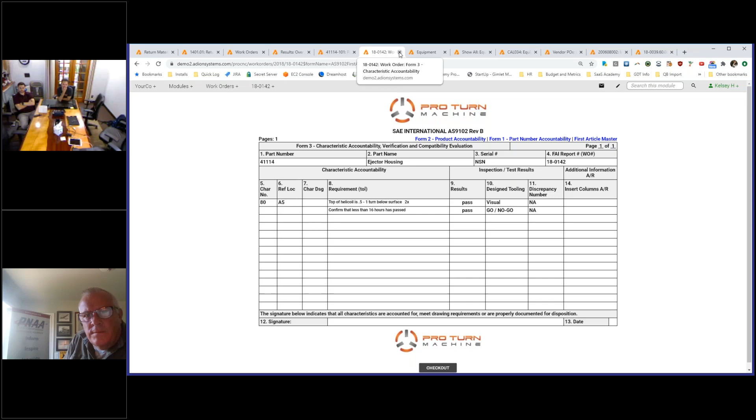The first article master - we can look again at that part number accountability type form here, and you can see that here's that part number that's been pulled as a subcomponent. If we look at the product accountability, it's got the aluminum bar and then characteristics associated with it. In this particular case, only for the top level assembly, but you can print an entire sub-BOM as well, so you could print the paperwork for all the subcomponents.

Do you think that covers some of that, Paul, or did you have something else you wanted me to take a look at? If you want to raise your hand, Alan, we could get some more detail on that.

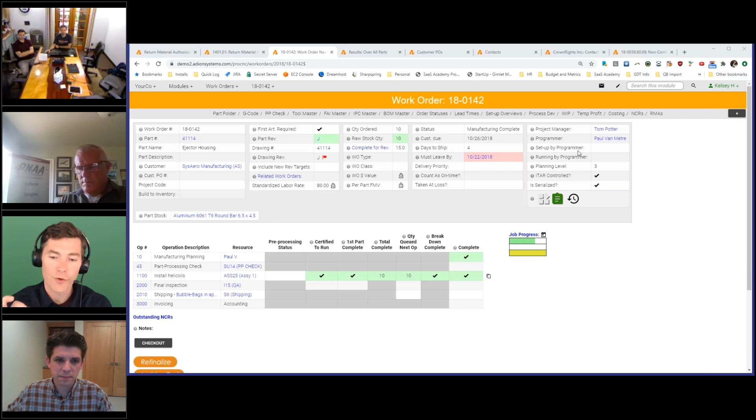Wow, okay. Yeah, one other thing I think is a really critical number - obviously that's a bit mind-blowing - but one other number that ProShop tracks specifically, and that we always focused on when we were running ProCNC, was what we call total company effectiveness. You could see by part of what was happening, and Dagan was doing a great job of showing you some of the ways things are done, even some non-conventional stuff. If stuff is being done, say, more by machinists, and I mentioned the packaging one, the question is: is that overall a savings? Are you actually saving time and energy? I thought you were, but how does that actually play out in ProShop?

ProShop chooses to show you things on sort of a net efficiency, which means you look at the entire organization and say, well, we don't have any packaging people anymore because we don't do that anymore - how much did that save us, even though we're seeing a decrease maybe from machinists machining parts? So total company effectiveness, which is basically what we'd consider that, is a real factor. I know that because people have been able to seriously reduce overhead positions, things that might have otherwise been lumped in under overhead, they actually see significant gains to their bottom line, even if the total productivity of the shop feels like it hasn't changed. Like, oh, we're only putting 5 or 10% more through, but we managed to cut out some non-value added time and substitute that in for value added.

Nice. So a couple more questions here, and I think we need to start wrapping things up. Yeah, there was one here about whether the program goes into estimating. Yes, ProShop is very deep on estimating. There's a ton to know about estimating, and we go a long way with estimates for sure.

Let's go down a level here, let's go to this one, we'll go to this estimate. So this is an estimate for a machined component that includes a few different milling operations, possibly even some different routing options. We go a long way with this in terms of being able to detail it down to exact percentages of labor you're applying to any operation. So it isn't just like 2 hours of setup and 10 minutes a piece - we really dial it down to this machine at 25% labor, and this machine charged out at $60 an hour, as opposed to this one, which is only 43, or this one, which is 20. So you can go a long way by operation, detailing all of that out.

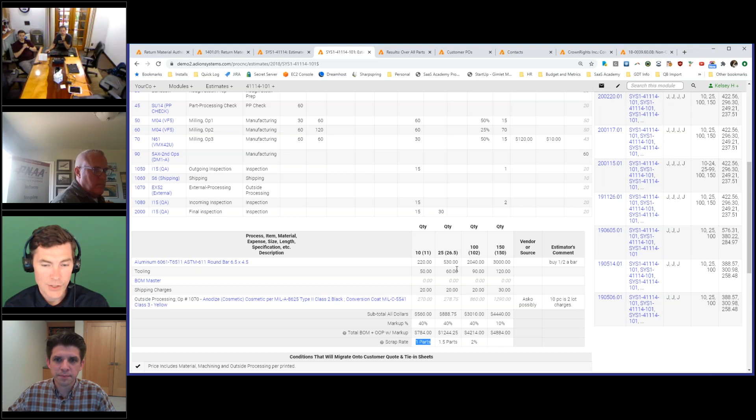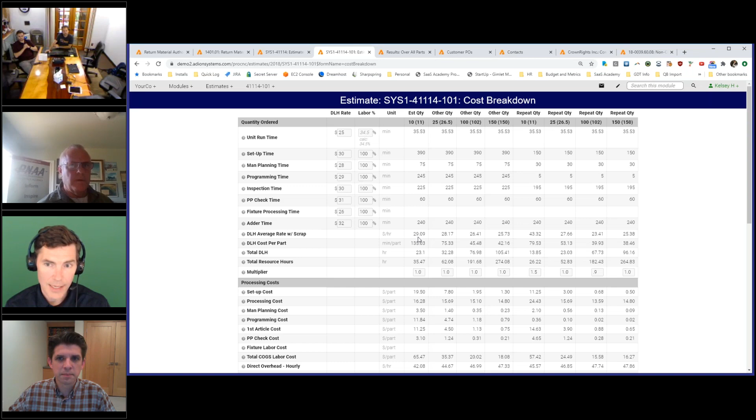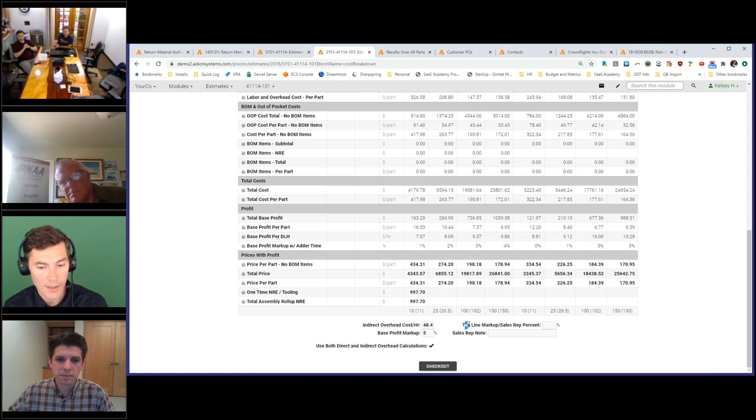You can look at raw material costs, outside processing charges - including, like here, we've hit a minimum lot charge for 10, and then by the time we got up to 25, we've exceeded that minimum lot charge. Markups on that type of product - so you can say, yeah, we're going to mark this up a certain amount for our out-of-pocket costs. And then we've included scrap rate as part of your estimating costs, so scrap's not just sort of a by-the-by - it's actually included in our complete cost breakdown, which shows you everything to do with this part, including if we had to make an extra one in order to get that far, that's included in the time element. Depending on how you do this in prototyping and other things, that can be hugely important. So we get a full breakdown, and included in that, base profit margins or even top-line markup, or something that a sales rep might include.

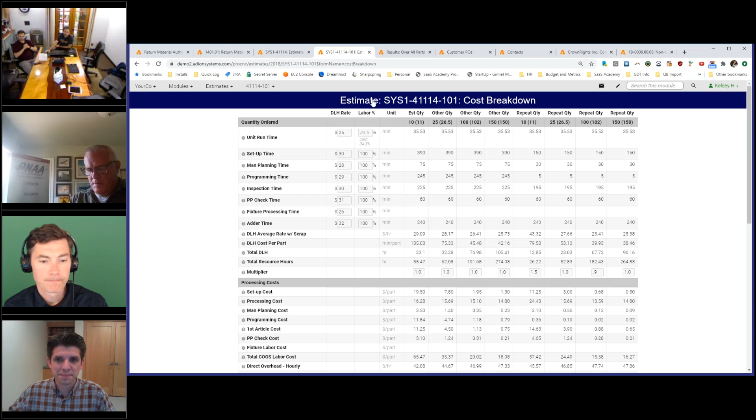So Dagan was talking about how their estimators are doing all this remotely from home the last 3 months, and that they're basically building the router as well. So that feeds right into planning, who will verify those router steps, make any tweaks they want to make to it, and then issue the work orders.

Yeah, and that detailed planning, especially on new runs, is something programmers are often involved in, right? This whole part programming and modeling portion - somebody's going to spend 4 hours making sure that's not only planned correctly, but has the right kind of programs applied to it. So that's all stuff you can put in here.

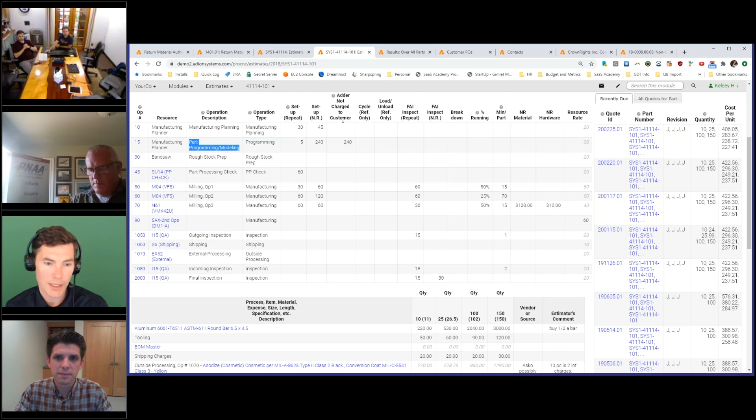Including specific times that you may not want to charge the customer, but the floor is going to take, and that builds trust between estimating and the shop floor. The worst thing for shops is when people start ignoring the targets because they think estimating is always wrong. But they're not wrong on pricing - that's how we're winning the work. They might just not be conveying their intent, which in this case is the adder time, that it will take you that extra 4 hours, but that's okay. We've covered that in some way or other.

We can do one more question and then wrap it up. Someone asked about when a machine operator is logged into more than one machine, how do we determine the labor cost per machine? Do you want to handle that one, Kels?

Yeah, sure. On the labor cost, we're only taking a percentage of the time they're in on that job. So if they're running 2 jobs, say 70-30, it's going to take their total labor cost for those hours worked, and put 30% on this job and 70% on this job. In terms of machine hours, the machine was fully captive, we call it. Even if it wasn't running every single moment, no other job could have snuck in there in the middle of someone else's time tracking.

So the machine itself was being utilized for that time tracking, and that's included in the direct overhead rate for that particular machine. You can actually assign direct overhead rates to specific resources, since some resources are more expensive than others, and then ProShop assigns that direct overhead based on the time tracking entry at 100% directly to the job.